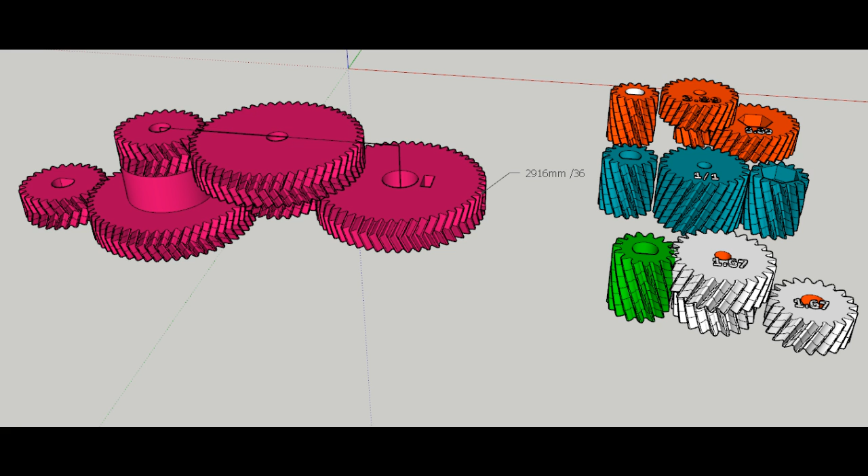To locate gear tool in SketchUp, you go in Extension on the top, Gear Tools, and you can select involute gear. That's what we're gonna work on.

From your CAD file, you will find the dead center of the two axes you need the gears for. So you can see right here I have two lines going up. I will measure that size.

You can't see my mouse, don't know why, but in the lower right corner you're gonna have 2916 millimeter. It's kind of huge, it's the way I work with files. I do everything times 100, it's just easier to work with smaller parts.

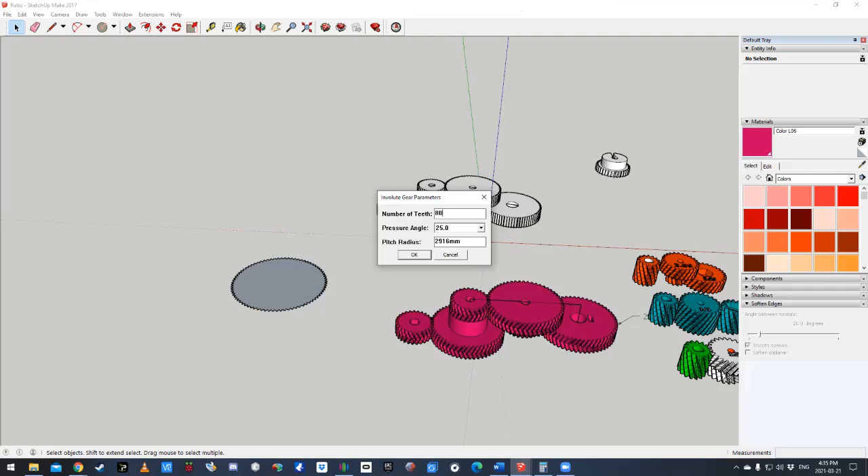Then you go in your extension, Gear Tool, involute gear. This is gonna be the 2916, it's gonna be your pitch radius, it's gonna be the maximum distance in between those two axes.

You will then try a different amount of teeth to have something that looks like a gear. It's just the first step, you will fix that later. For this test, I'm gonna go with 80 teeth.

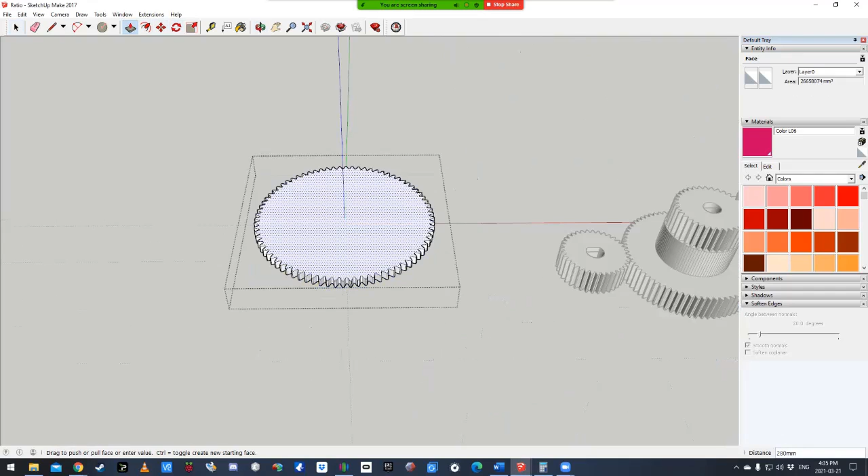Then I'm gonna give some height to my part so I can actually test it in my slicer. That's a really important step in 3D printing because you want to make sure that you can actually print those teeth.

So we're gonna save it, open it in my slicer. You see I have scaled it at 1% just so it fits in my printing bed.

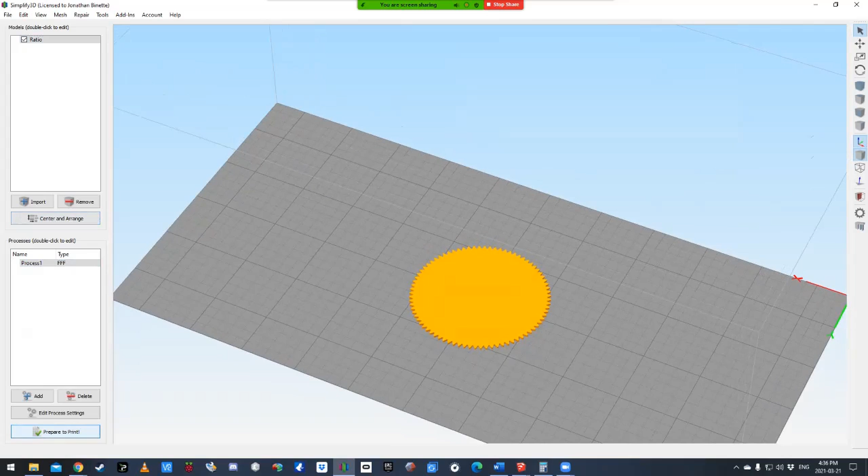Then when you proceed to print, you can see your outside layers. You want at least 2 layers in the teeth. I have 3, it's pretty good. Or at least the minimum, you want some filling in those teeth. If those teeth are empty and only one outside layer, you're gonna have a problem.

Now you have proper teeth size. You will take that amount, so we're at 80 teeth for 2916. You will divide 2916 by 80. It gives you 36.45. It is not good, you want a round number.

So for me it's pretty easy, I already know it, it's 81. You can go up and down until you reach a round number. So 81 gives me 36, which is a perfect number.

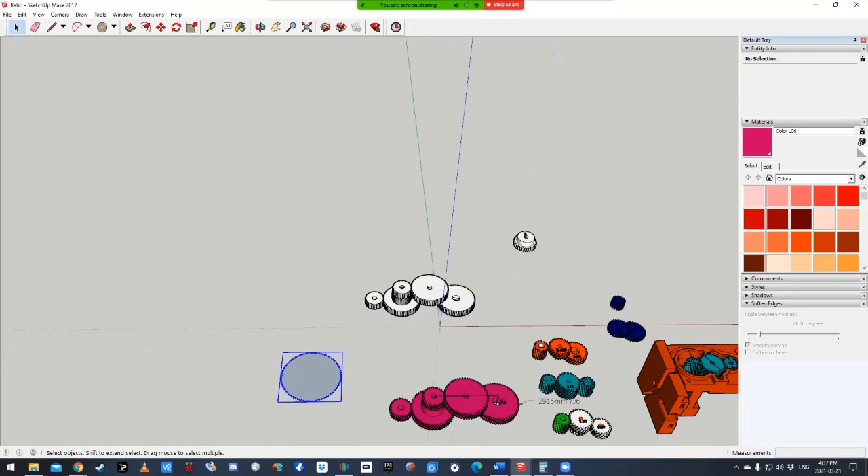So let's recap: for 2916 millimeter of pitch radius, you can now have 81 teeth that will be the proper size to be printed and can be divided in between your gears.

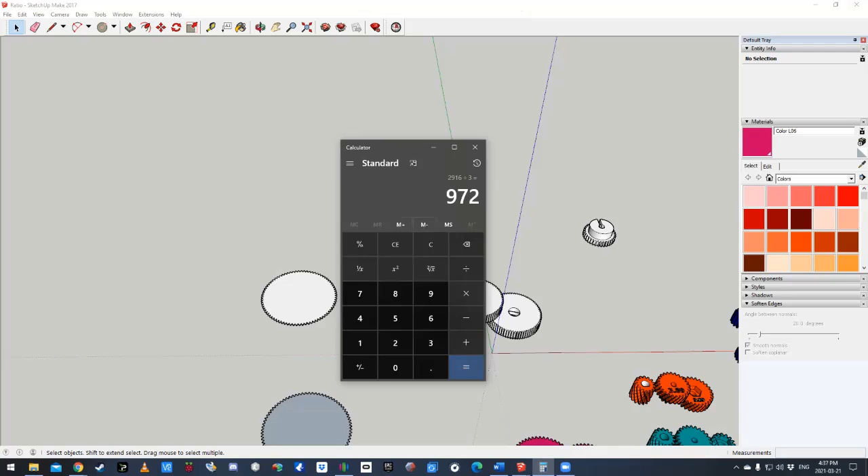For that example, I will do a 2:1 ratio, just so you can see the two different numbers. So for my gear A, I'm going to take 2916. I'm going to divide it by 3 because you have a 2:1. So my gear A is going to be 972 millimeter.

My gear B is going to be 1944. This is where the 36 enters in function. You're going to divide 972 by 36, which gives you the amount of teeth for that gear. We have 27 on gear A and 54 on gear B.

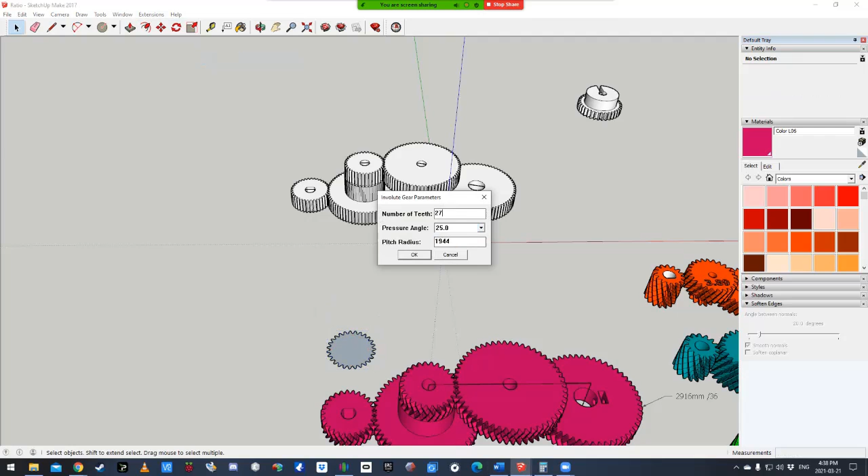You can check for reference. You can draw a line for the full size of your pitch radius, then center both your gears on it, and that will confirm if you have the right size, if you did your division well.

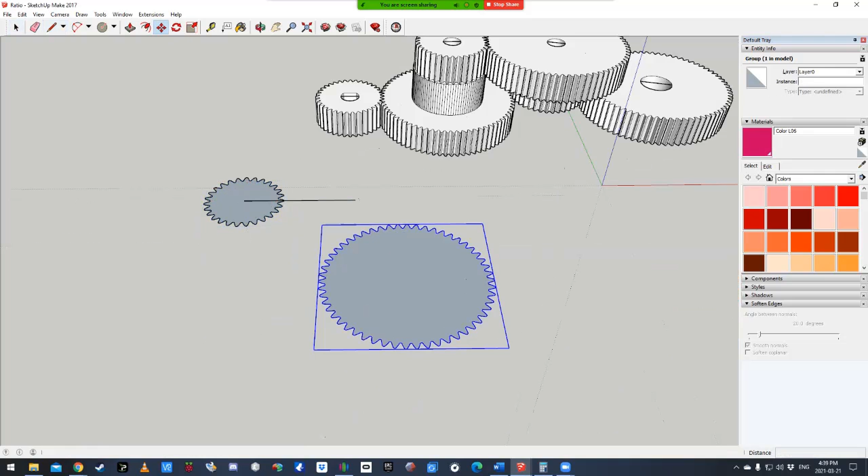You're gonna have functional flat gears. You can give them a height and use them as is. Now we're gonna explain how to do angles in the teeth, functional angles, and also herringbone gears.

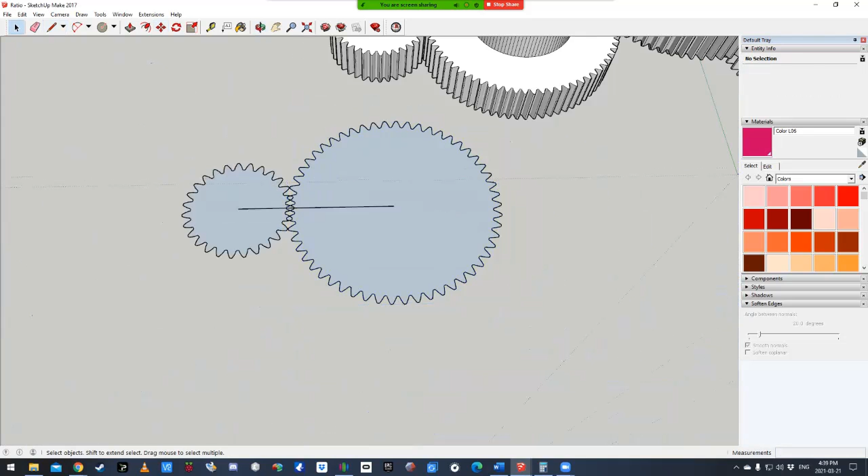But first I will show you an awesome tool called geargenerator.com. The link is below in the video. With that tool you can check your gear ratios. So you set your first gear, set your second gear, and on the top left it gives you your ratio. You can try different setups, you can stack them. It is an awesome tool for gears.

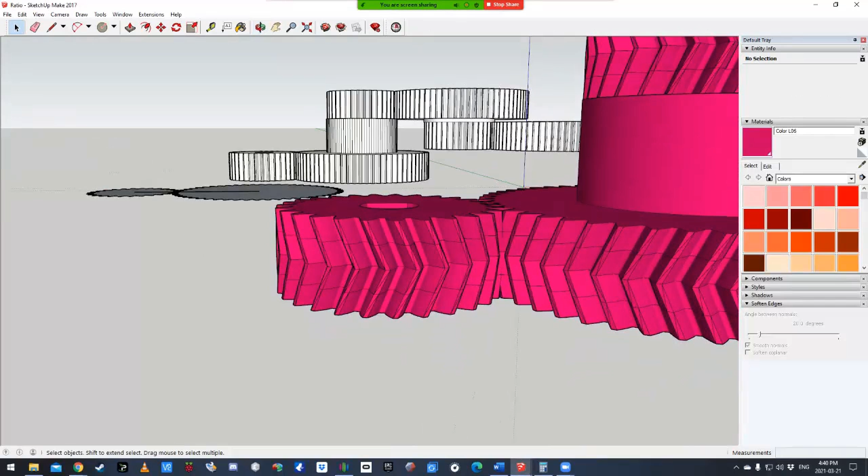Okay, back to our set. We're gonna start with giving them an angle. For it to work, you have to do it by step. If you do it in the full height at once, you're gonna have a narrow center, it won't be working. So we're gonna work with a 2mm step here.

So you inflate it, take the top, rotate your first gear with the angle you want. For an obscure reason, you can't just give a 5-degree angle to all your gears. It does not work. I'm not good enough in math to actually explain why. It just doesn't. So here's how I do it.

Inflate it 2mm. Select a point, give it a 5-degree angle. That's what we're gonna work with here. So now you have your first level, go up another 2mm and another 5-degree angle. You have your gear A.

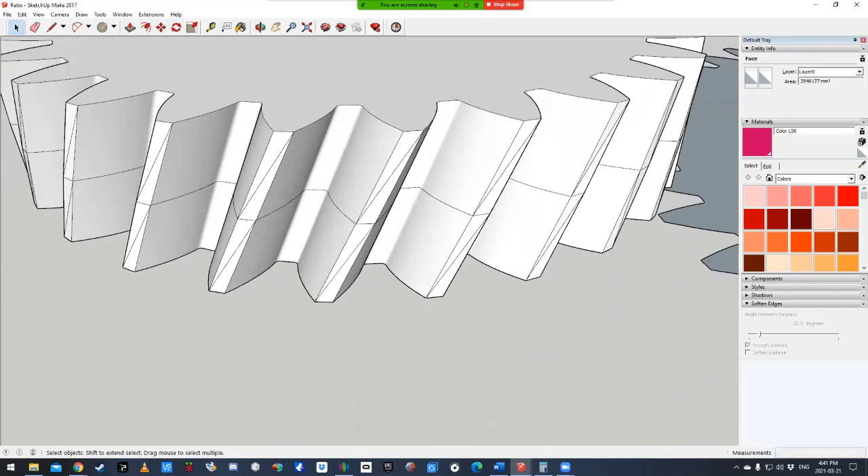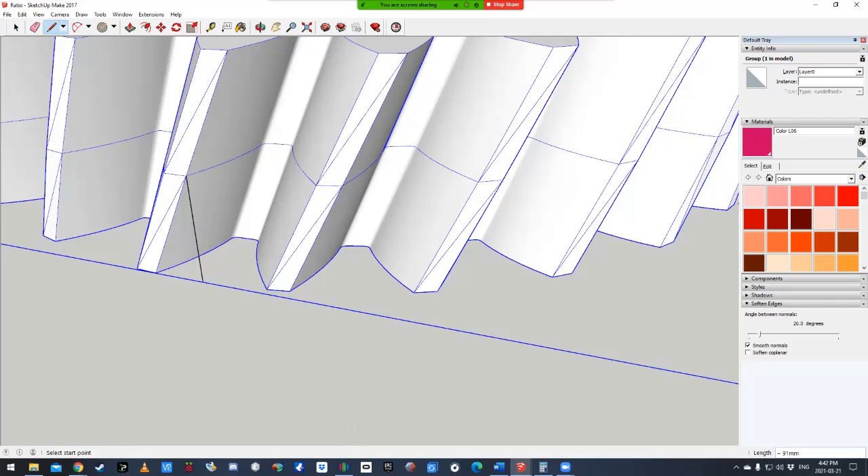Now gear B is a little bit more complex. To get that angle ratio, I tried different math, it wouldn't work, I'm not that good. So what I do is I go back to the first gear, I draw a line from the top of a section to the bottom of the same section, then I measure in between that line and the tip of the tooth. That will give me 91mm.

That 91mm, I go on my gear B. I gave it a 2mm, same height as gear A. I'm gonna draw my lines. So from the bottom of the section to the top, 91mm and up. Then I rotate, take my top plate, top face, I rotate it.

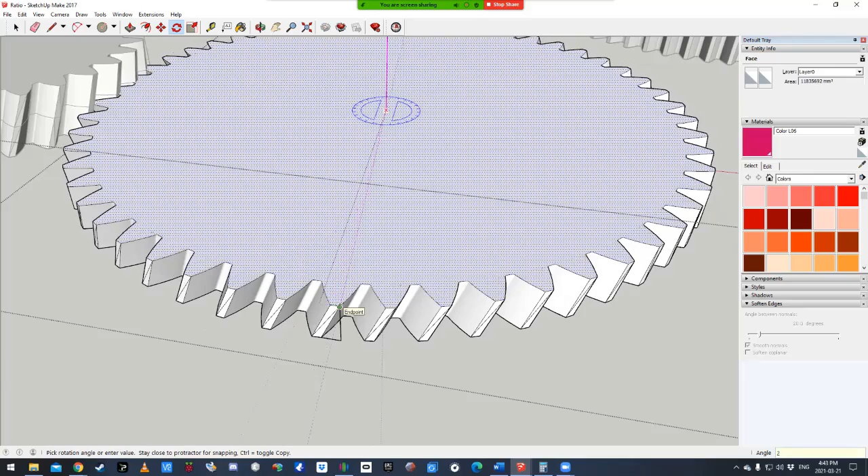And I can read in the bottom right 2.6 degrees. That's a big thing. It's an average because you do it with the mouse, so you have to type it with your keyboard. If you don't do that, it won't work.

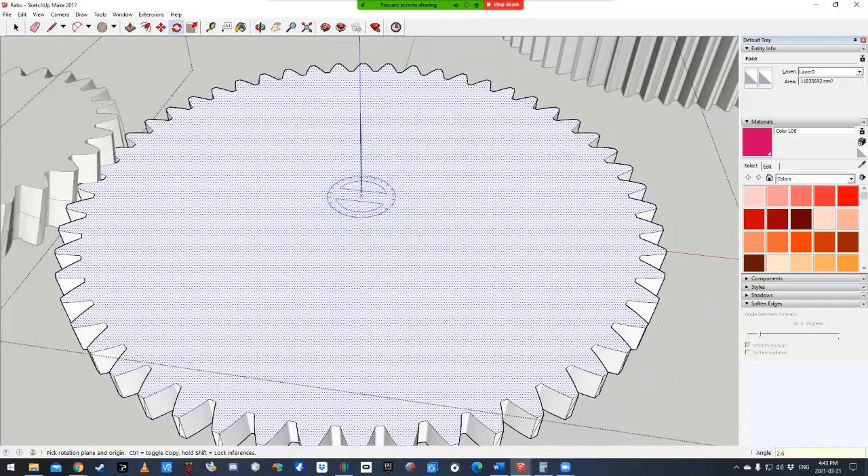So now that you have that section, you're gonna realize it is in the wrong way for the other gear. So just take your top face, remove 2.6 to get back to 0, then do minus 2.6. It's gonna give you the right rotation for the first gear.

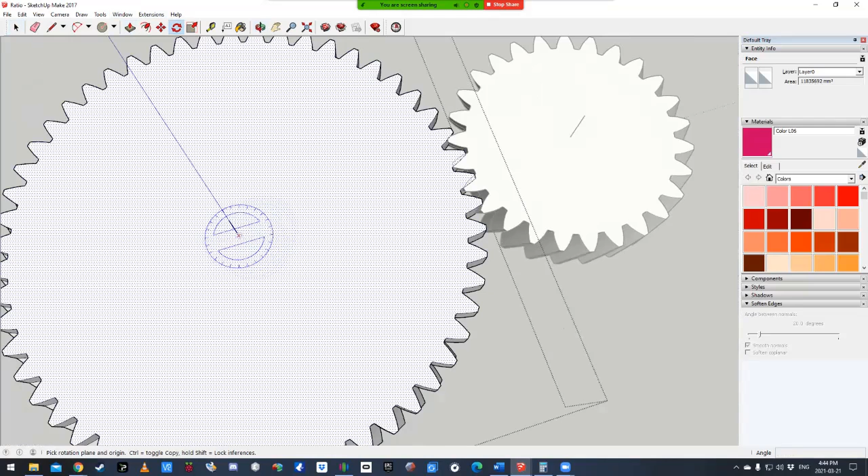Now that you have your angle and your height, you pop it up another 2mm, another 2.6 in the same direction, and we can see here our gears are a perfect match.

From there, go back to your gear A. If you want to do a herringbone, you lift and you're gonna rotate in the opposite direction. So you're gonna do 2 sections, or it depends on the size you want to reach. For this one, I was reaching 8mm total, so I did 2 sections on one side, and 2 sections on the other side. I'm gonna get a perfect herringbone, and I know the gear fits with their axes. They're not too far, they're not too close, and there it is.

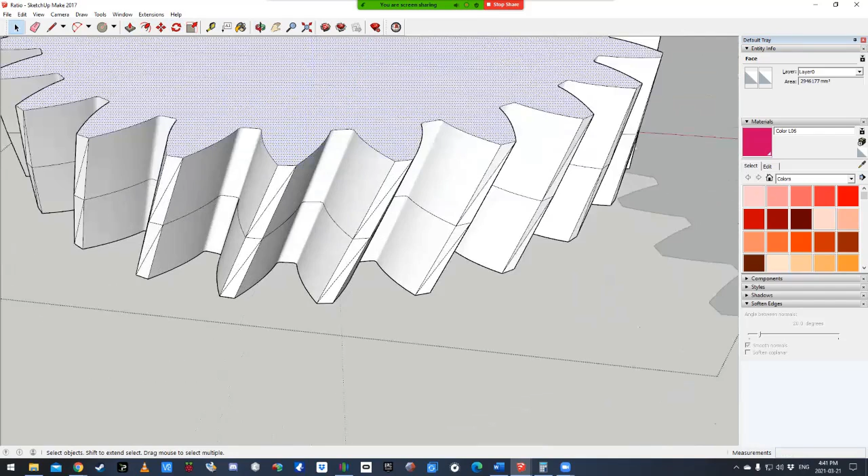It seems complicated. Once you get used to it, it is really easy. Just remember, take your 2 numbers from your 2 axes, that's your pitch radius. Divide it between the gears you need. If you have a floating gear in the middle, I prefer to do it in 2 different maps: gear A to the middle gear, then the middle gear to gear B. But yeah, you divide it and get your gear ratio from geargenerator.com. You can get the gear ratios you want, and there it is.